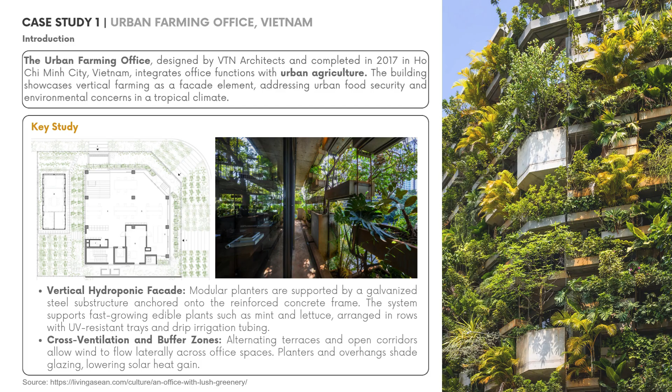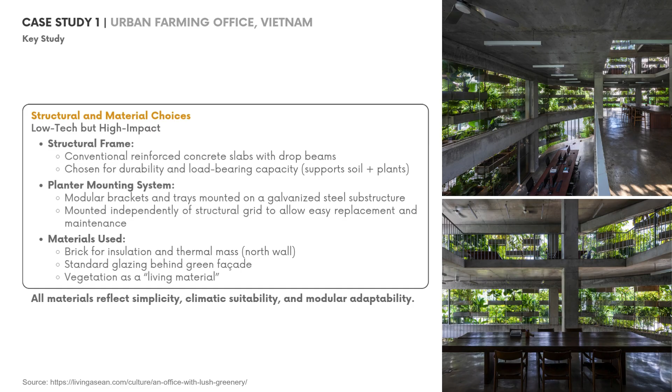In terms of structure and materiality, the structural frame consists of reinforced concrete slab with drop beams to support the additional loads of vegetation and soil. The facade also uses standard glazing behind the plant system, modular and climate adapted, offering high impact with low tech.

For the impact on building performance, with this technology the interior temperatures were recorded 3 to 5 degrees lower compared to conventional offices, and the hydroponic facades and passive design strategies reduced cooling energy demand by 30%.

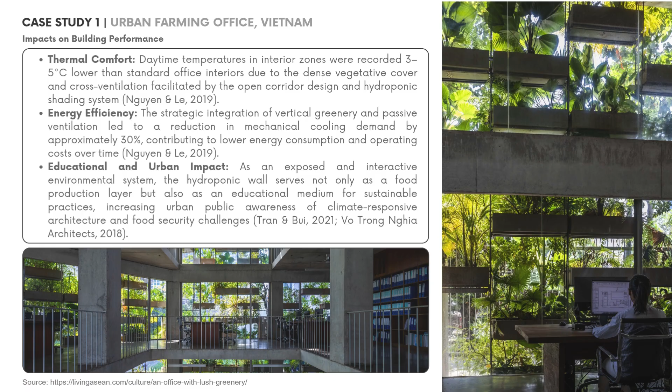The green wall also serves as a public educational feature to enhance awareness of sustainable urban living. The second case study is Kampung Admiralty, located in Singapore.

Kampung Admiralty is Singapore's first vertical village integrating residential, healthcare, commercial, and public facilities in a single high-density development. It is a prototype of aging-in-place design that adapts tropical architecture into a socially sustainable form.

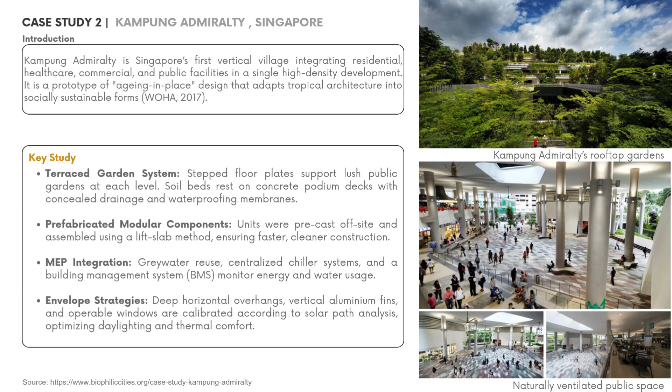The integrated rainwater harvesting system is one of their sustainable water management strategies, including a multi-level water capture system where the terrace garden acts as a bioretention basin, and a gravity-fed system that collects rooftop rainwater into a storage tank, as shown in the diagram.

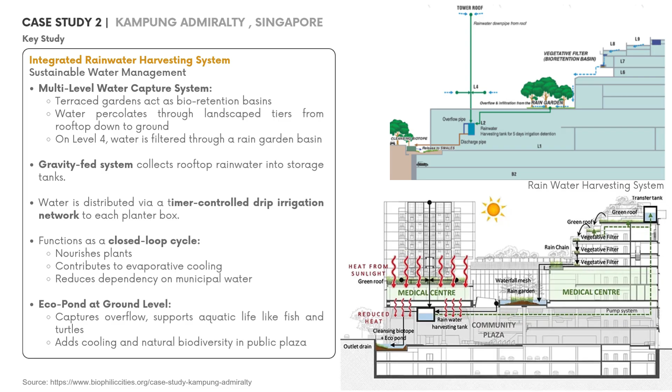The water is distributed via a timer-controlled drip irrigation network to each planter box, functioning as a closed-loop cycle that nourishes the plants and contributes to evaporative cooling. The eco pond at ground level captures overflow and supports aquatic life like fish and turtles, acting for cooling and natural biodiversity in the public plaza.

The construction methods and materials combine modularity and natural expression. The primary materials are reinforced concrete, precast facade panels, and glass and aluminum for the glazing and lightweight framing. The building utilizes standardization and coordination through modular bathroom or kitchen pods in the apartments, and a barrier-free accessible layout with universal design.

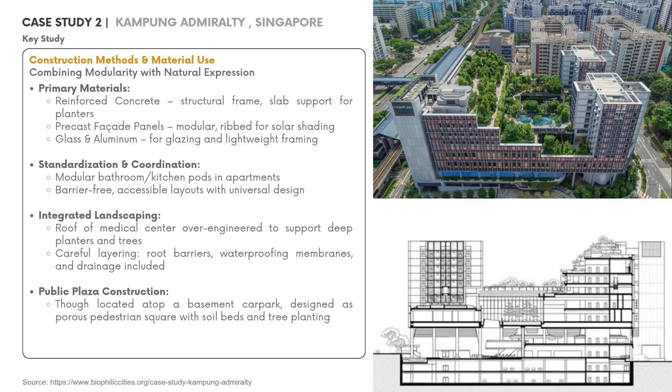The building also integrated landscaping - for example, the roof of the medical center was over-engineered to support deep planters and trees. In terms of social impact and environmental metrics, Kampung Admiralty is Green Mark Platinum certified, with 51% of lighting energy supplied on-site by solar.

The rainwater harvesting saved 4.5 million liters of potable water annually, and passive cooling reduced the aircon load by 50%. Socially, it also improved health outcomes by offering easy access to greenery, recreation, and healthcare all in one building.

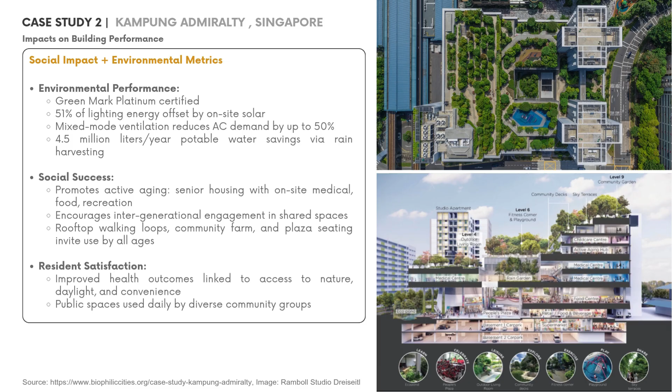Moving on to case study number 3, REXKL Community Hub in Malaysia. REXKL, located in Kuala Lumpur, is a famous adaptive reuse project transforming an old cinema into a vibrant cultural and commercial community hub.

Despite its cultural success, the building has performance limitations related to daylighting, ventilation, and overall environmental sustainability. The issues include an insufficient building envelope, with the concrete facade on the rooftop lacking insulation and shading, increasing internal heat gain and reliance on mechanical cooling.

The second issue is inadequate ventilation, where limited openable windows and openings cause overheating and reduced air quality.

The third issue is poor natural daylighting, particularly on the upper level bookstores and retail area, due to a fully enclosed ceiling. There's also overheating under the large roof span, especially on the upper level, and an additional issue of basic rainwater drainage with no use of runoff.

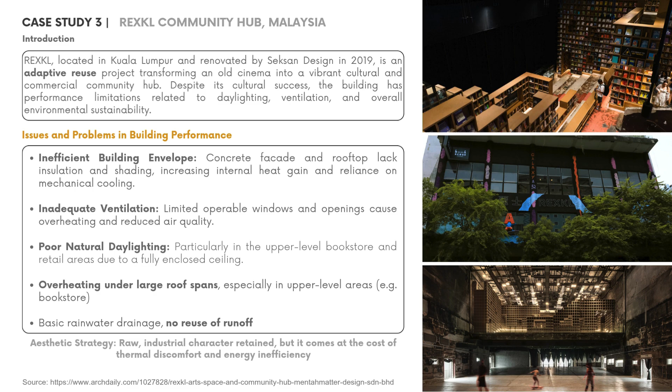The first proposed advanced technology solution for poor daylighting in the upper bookstores, due to the enclosed concrete roof, is to install semi-transparent building integrated photovoltaic (BIPV) glass panels to replace a section of the roof slab. These panels allow light in while generating electricity, applied directly above the upper level bookstores where natural light is currently blocked, improving visual comfort and reducing lighting energy needs.

The advantage of this application is enhanced daylight penetration and interior comfort. It also generates clean electricity for lighting, acts as a radiant barrier, and reduces heat gain. It extends the roof life by shielding it from UV exposure, transforming a thermal and lighting weakness into a productive, passive energy solution.

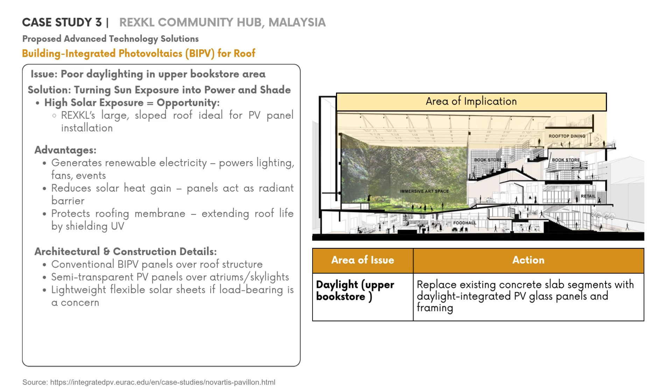The next proposed advanced technology solution is smart adjustable louvers for ventilation. The louvers will be installed just below the roof slab and on the upper facade to promote stack effect ventilation and natural cross breeze for the whole building.

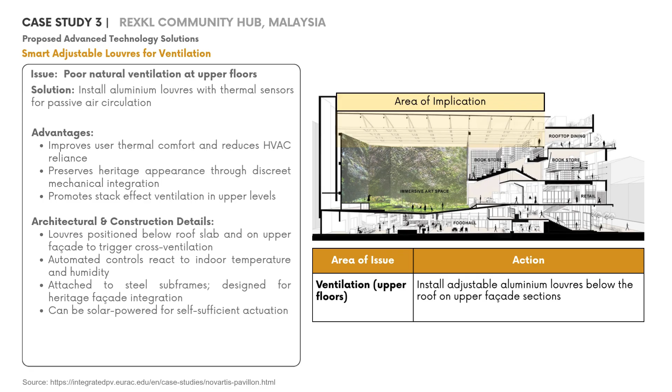The advantages of this application are improved thermal comfort without increasing the aircon load, reduced mechanical ventilation dependency, and maintaining the heritage facade appearance through discreet integration. It is also powered by solar to make it self-sufficient. This solution introduces smart climate control while respecting the building's adaptive reuse character.

The next proposed advanced technology solution is to install a modular green facade system for the envelope upgrade. This retrofits the facade with a modular green wall system using steel frame planter boxes and climbing plants, added to the front facade and potentially expanded along the side and rear elevation.

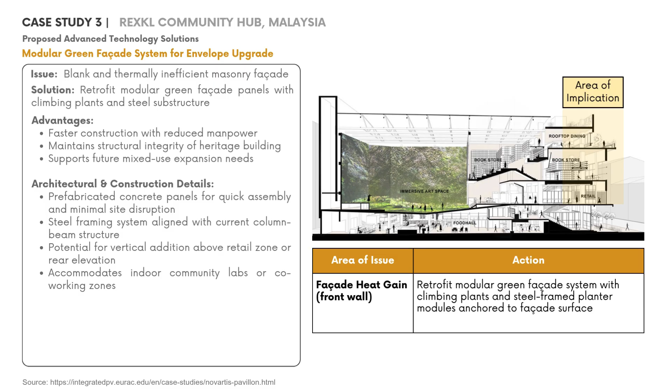This application provides advantages of shading and insulation, reducing indoor temperature and the urban heat island effect, while enhancing the building's biophilic aesthetic.

The next proposed advanced technology solution is the rainwater collection and drip irrigation system, applied at the front facade. This includes installing a rainwater harvesting system with a rooftop collection tank, a basic filtration unit, and a drip irrigation network. The tank will be integrated into the rooftop garden or service deck, with water piped to the green facade and even the toilet flushing system.

The advantage of this system is reduced dependency on municipal water, providing a sustainable source for irrigating the vertical greenery. It also improves plant health and reduces long-term operational costs.

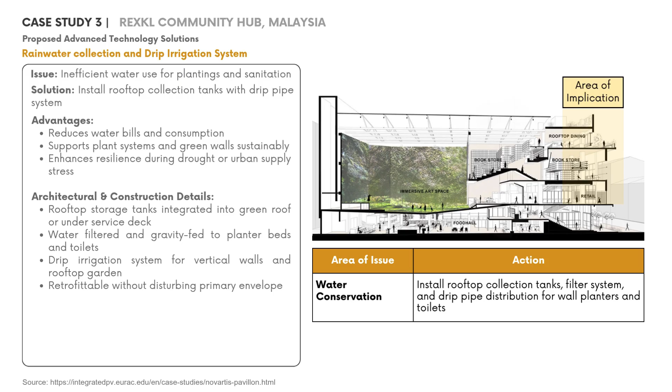For the ventilation issue, adjustable aluminum louvers with thermal sensors were installed under the roof level to enable natural cross ventilation and stack effect cooling, reducing dependency on mechanical ventilation.

For the facade heat gain at the front wall, a modular green facade system with climbing plants was proposed to provide shading and reduce urban heat gain, while enhancing the facade aesthetic and microclimate.

The water conservation issue will be solved by rainwater collection tanks and a drip pipe irrigation system, supporting the green facade and planter maintenance, while also reducing potable water use for toilets and landscape irrigation.

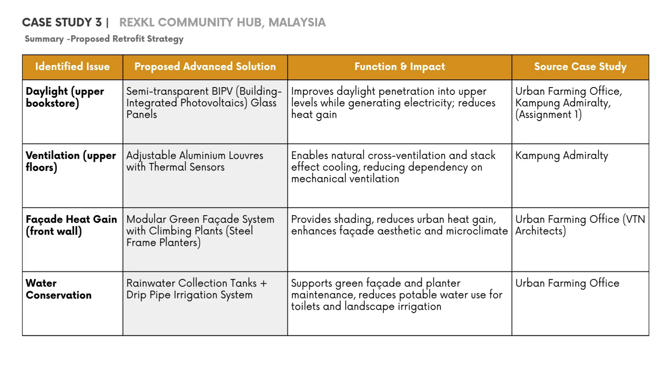Together these strategies will upgrade REXKL into a climate adaptive, resource efficient, and community responsive hub, while respecting its heritage and character. Thank you.